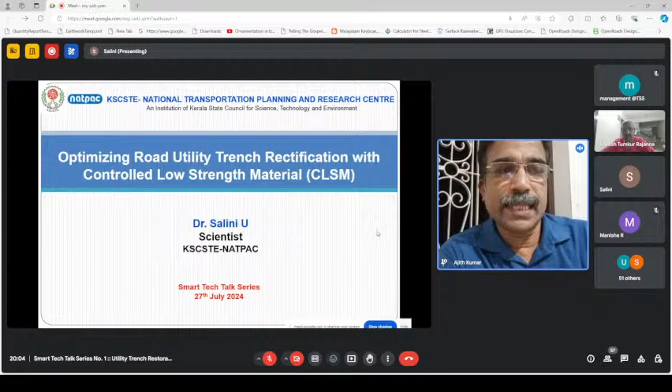As we all know, utility agencies such as water authority, sewage, underground drainage, electricity cables, telecommunication lines, and gas lines have various degrees of authority to install these lines within the right of way of our roads, ensuring they do not create any inconvenience to road users.

They can accommodate the utility in urban areas in either open trench, as shown in the figure, or ducts. For existing roads, if it is beneath them, they can provide a duct, or during new road construction they can provide a duct. So these are the available technologies.

Also in case of heavy traffic, they can push a precast RCC block below the road, within the embankment. So these are some of the solutions and methods by which they utilize the right of way of our road.

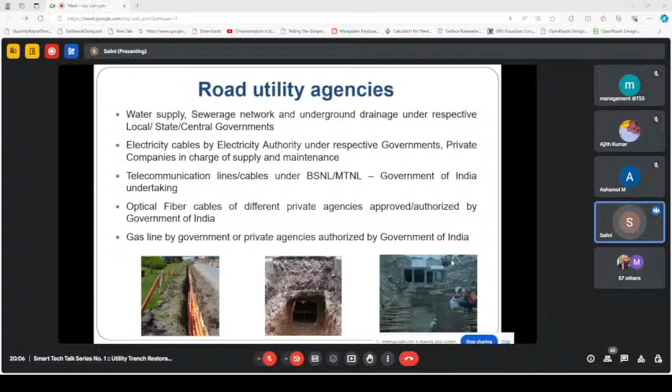IRC guidelines specifically mention how these need to be installed, and what is the location for each agency or each utility, along with the depth of installation specific to different agencies. This is given so that it is secured, and also to safeguard them from any superimposed load.

The depth, as per IRC, is at least 0.6 meter below the bottom of the trench - that is the lowest - and it can exceed 1 meter depending on the type of utility. This table shows that the installation depth for different utilities is different.

This is so that there is no cross connection - like when we have to dig and give a cross connection across the road, these should not be obstructed. That is why different levels of location have been given.

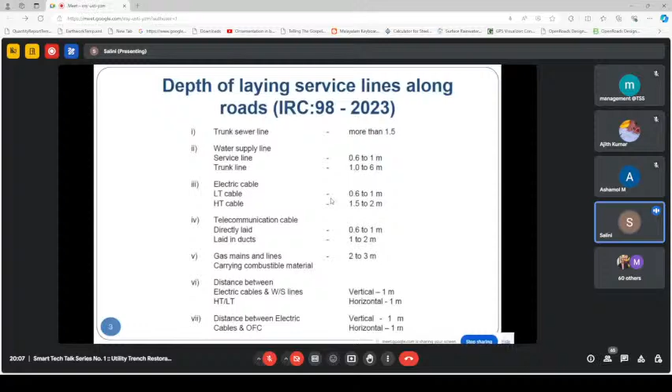Once we dig a trench and the utilities are laid in it, this trench needs to be filled with sand or any granular material. But while filling, we should make sure it is saturated and gets compacted to the modified Proctor density.

Above this granular layer, sand or other granular material filling is usually done till the subgrade level. Above that, whatever the existing road condition and prevalent layers are - base, sub-base, and bituminous layers - those exactly have to be placed so that there is no difference which can occur.

The level of the reinstated trench shall be flush with the adjacent road. If it is not so, it will cause discomfort for riding. Also, any neglect in proper compaction or selection of granular material can lead to many hazards or distresses, and subsidence in that area alone, which again can cause serious issues.

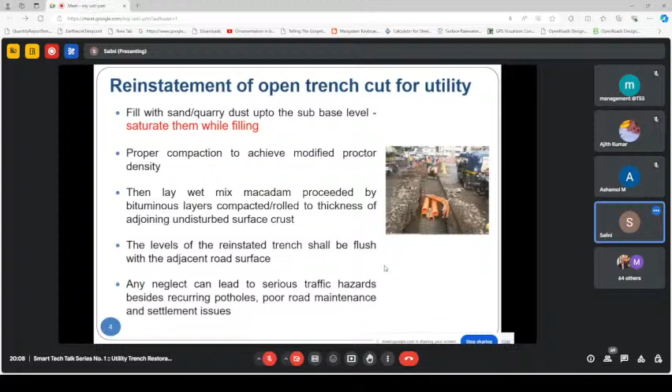The IRC guidelines state that if the depth of fill is greater than 450 mm below the crust, you can fill the entire trench with sand or granular material. Or if the excavated trench material available is of similar quality, you can use that, but make sure it is properly compacted by an ordinary power roller, heavy plate compactor, or a small walk-behind roller.

If the depth is greater, make sure it is mostly granular material which you are filling. Also, depending upon the level and location, each layer should be compacted to the required criteria, similar to embankment and subgrade as given in IRC 36. Deep and narrow trenches are very difficult to compact if the width is not sufficient for an ordinary roller to pass over, so we use small compactors such as plate compactors, frog hammer compactors, or small walk-behind rollers.

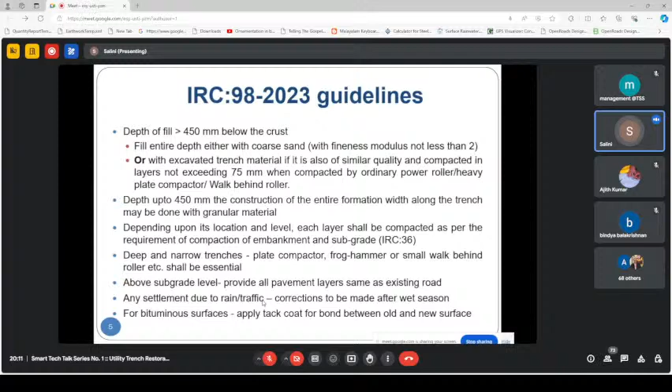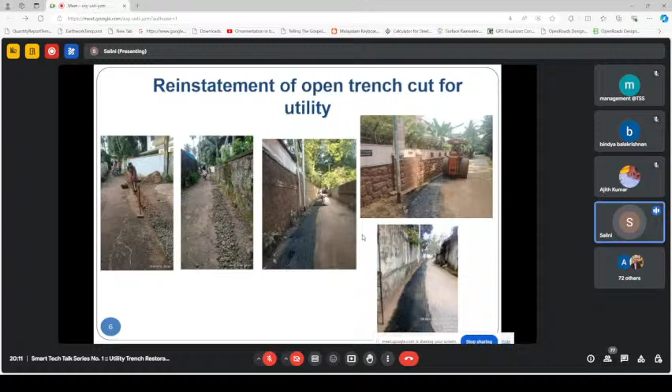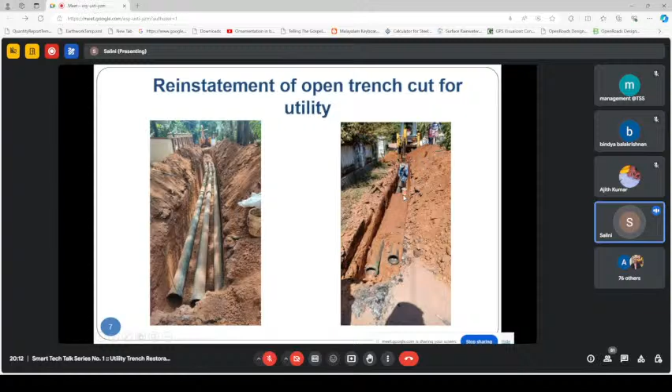This leads to many problems—you can see where the drainage was, there is some kind of subsidence, and if water stagnates over it, it can lead to serious issues like water logging, and in the future some kind of hazards can also happen. These problems mainly occur because some trenches are very deep and narrow and inaccessible for proper compaction. So if we compromise on the compaction or the material, a lot of distress can happen.

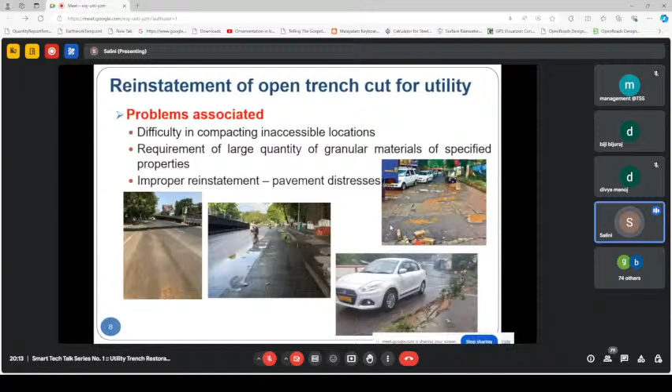So here is another road, in Trivandrum itself. By looking at the picture it may not be that visible, but there is some kind of curved surface occurring just below where the water line was placed, along the entire road stretch. When the vehicle passes, you can feel that vibration, and you can see the vehicle moving in a discomforting manner. Similarly, when the rains started, around some places where the compaction was not proper, potholes were observed.

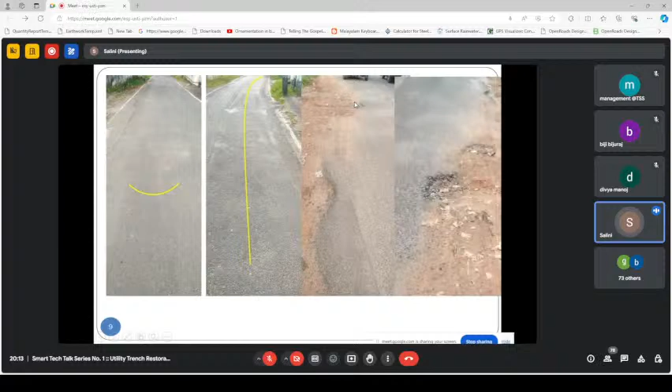So IRC 98/2023 specifies another method also. It suggests an alternate method suitable for places where the trenches or the filling of compact material is not proper, and inaccessible places are also present in these trenches. That alternate method is to use a flowable fill, or controlled low strength self-compacting cementitious material. This does not need any kind of compaction because it is flowable in nature—once you pour it, the hole just gets filled, and its specifications need to be followed. The US Bureau started using it in 1964, and slowly we are picking it up in India also.

So this is another method which most of us are not familiar with, and this is given in the appendix. So this can be an alternative solution. So what is controlled low strength material?

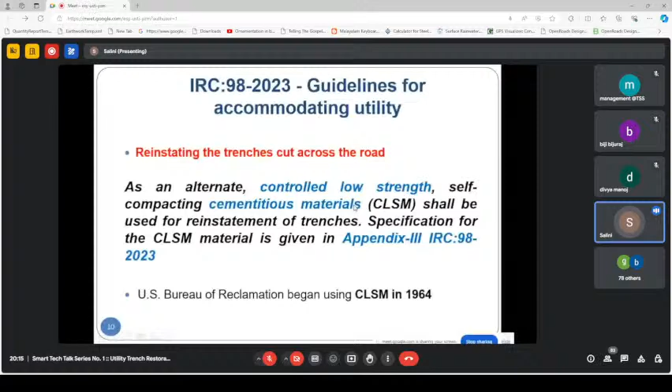Controlled low strength material is a weak, runny concrete mix used for backfills or utility fills. It is mostly suitable when the places are inaccessible and proper compaction by any other method is not possible. So this fill should be in a flowable condition. It should pour like a grout or a lean concrete mix, so it will go and fill all the voids, and then it should set and harden within some specified time, and also have a minimum compressive strength.

In the case of compressive strength, the maximum compressive strength which the code, or as per application, suggests is it should be less than 8.3 MPa. That is for all applications. We say that it need not be very high like our normal concrete, we need only very little strength.

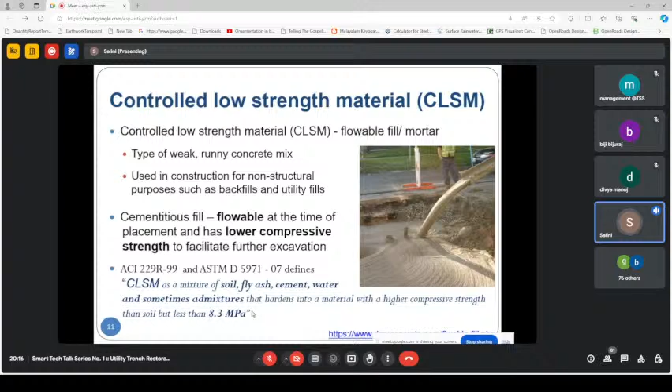So the mix selection depends on two criteria. One is the flowability, that when placing the mix, it should flow and fill the voids, and then the UCS. Most applications require strength between 2.1 MPa to 8.3 MPa.

For excavations, like when we need to access the utility at some later stage, we should make sure that the long-term strength is less than 0.7 MPa if you want to excavate manually. But if you have machineries like a backhoe, you can go up to 2.1 MPa. Beyond that, it is not possible to excavate and it is very difficult, it may even create damage to your utility.

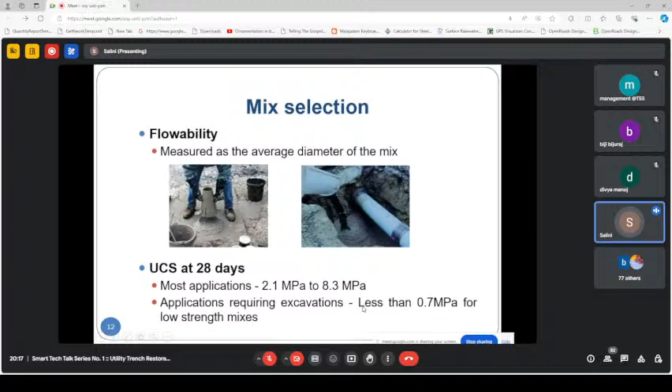So this is how it is done. You pour it and then it goes. Initially your trenches are like this, you need to have a utility here. It may be in such an uneven shape, or because of some adjacent structure, we are unable to compact in the normal manner, so you can keep your setup and fill it by pouring. So there is no problem of compacting this area if any structure is there.

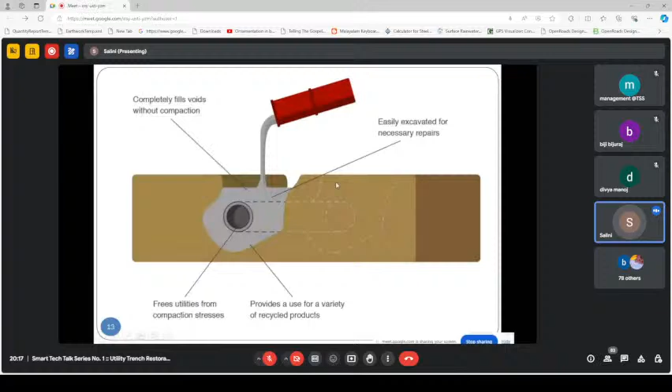So the basic application is for all utility work, and it is actually a replacement to granular fill. Wherever granular fill is not readily available and we need to transport it from other places, which will cause a lot of cost, like transportation charges as well as material charge, in such cases, backfilling pipelines, abutments near retaining walls, near bridge abutments is another area where this is a more suitable method for filling the holes.

Then inaccessible locations, underground storage tanks — these are some of the examples where we can use this.

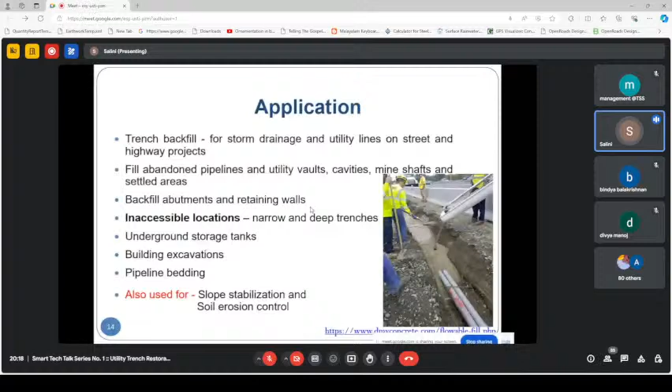So this is how, in granular fill, what the code suggests is we place in different lifts, each around at least 75 mm or some other thickness, and then we compact it. This we pour it, here also you can pour it in stages by giving different lifts. And since it is self-leveling, it does not require any compaction.

The material we typically use is a mixture of water, cement, and fine aggregates such as sand, whatever fine aggregate is available. If sand is not available, you can use quarry dust, quarry waste, or other foundry or recycled materials. Many industrial wastes are being used as fine aggregate for this mix, because if they have some pozzolanic activity, then it is much better, since it will react with cement and water and further hydration will occur, and we get more cementitious material for strength gain.

Mostly we are looking into the strength gain. Also, the strength gain should not be too high so that the material cannot be excavated.

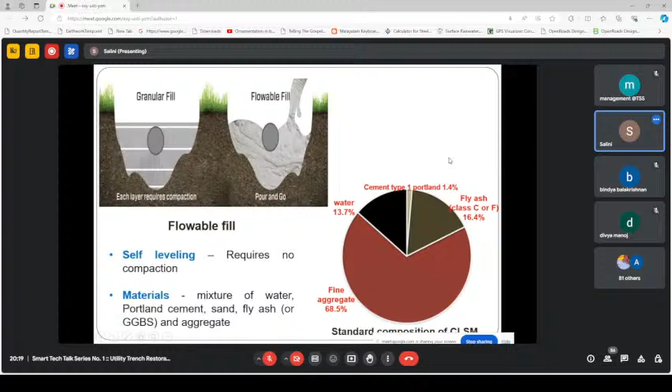So in material selection, what we mostly need to take care of is the cost. Suppose we have earthen material or backfill material readily available, we would not go for CLSM because it will be costlier compared to the locally available solution. Only in cases where it is highly inaccessible can we go for CLSM.

Also, the savings is mostly seen in the labor for placement and compaction, because we don't require any labor for compacting or placing, we just pour it from the plant, the truck, or the ready mix plant. Then, depending on the specific application, the materials should be chosen.

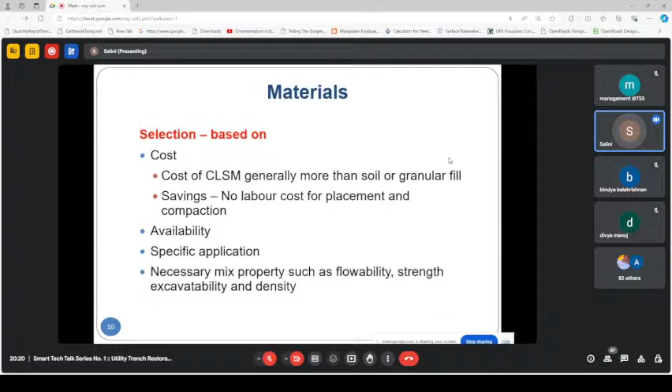The material criteria, mainly the mix criteria, we select based on flowability, strength, excavability, and density. The materials include Portland cement, any cement type mentioned in the codes, any grade—53, 43, 33—whichever satisfies the requirement can be used.

The amount of cement we use is usually 1 to 5%, because we do not need that much high strength. We need only less than 0.7 or maximum 2.1 in case of utilities where we need to excavate at some other point. If we do not need to excavate, we can go further beyond 2.1.

We also check the strength of the soil surrounding that trench, so usually we give the same compressive strength as the subgrade soil. Since we need only 1 to 5% cement, we use around 60 to 90 kg per meter cube.

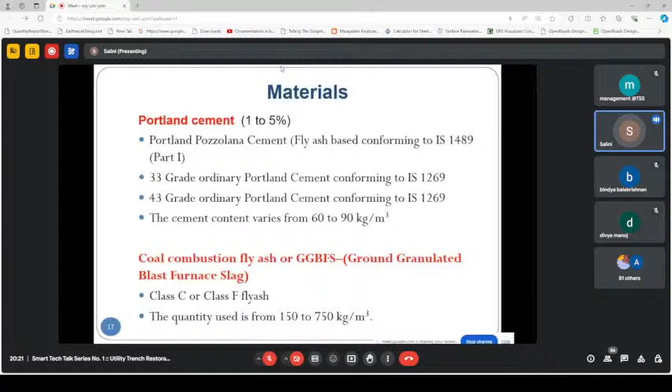Then for other pozzolanic materials like fly ash, GGBS, bottom ash, pond ash, different kinds of ashes can be used. These are suggested because they have pozzolanic activity. It is a fine aggregate as well as an alternate to cement, reacting with water along with the cementitious material such as cement, fly ash, or any other pozzolanic material. They should be sufficiently fine grained so that the material flows.

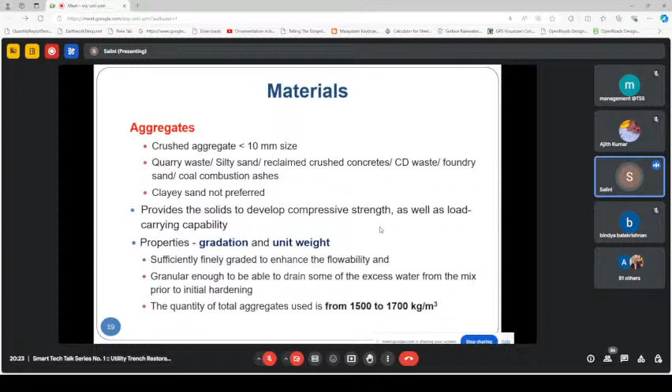Also, the total quantity of aggregates is around 1500 to 1700 kg. Water is another requirement so that we have sufficient flowability. The water-cement ratio should be selected depending on the flowability, strength, and segregation.

Some admixtures are also being used so that there can be improvement in the volume of the CLSM, and to provide improved workability, reduced shrinkage, less bleeding, minimum segregation, and lower unit weight. This also helps in extending the setting times. So extra cement or early-setting admixture may be added if required.

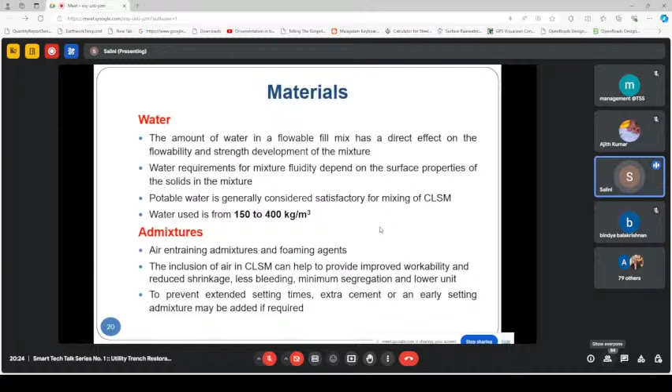Then the properties of the flowable fill basically depend on the mix proportion—the amount of materials from each category, how much we take, and how much flowability it attains. Usually we restrict the flowability to 200 to 300 mm.

Water-cement ratio is another criteria. While placing the CLSM in the field, it should be in a flowable condition—these are called plastic properties, related to transportation and placing in the field. Also, there are in-service properties after it hardens, which we need to ensure so that it can work properly. All of these are affected by the mix proportion.

So the plastic or wet properties, that is during transportation and placing, that we should take care of are flowability, segregation and subsidence, hardening time, and pumpability.

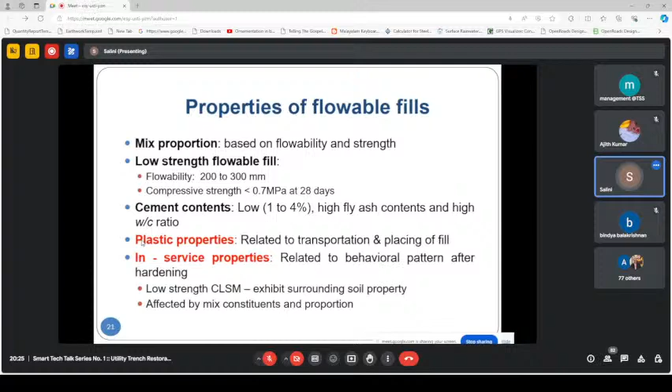Flowability can be measured by slump cone, grout flow, or flow cylinder method. This is how you measure the flowability—in both directions, perpendicular direction, the slump diameter—you just measure and find out. It should not be less than 200 or more than 300.

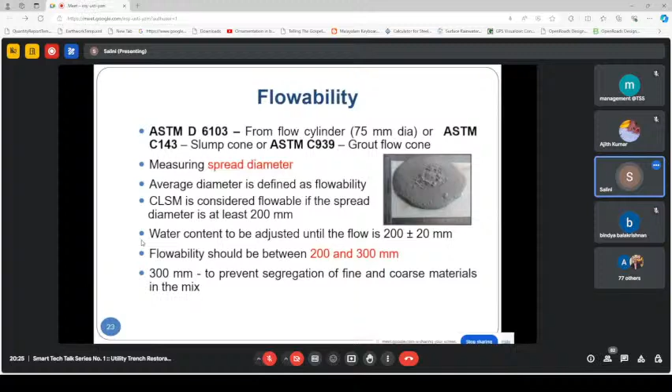If water is higher, then what happens is it comes out as bleed water. This is also not allowed, and the code restricts it to less than 5%.

Along with IRC 98, we have the American code as well—American Concrete Institute 229R—another code which we follow, giving all the standards that need to be followed to check the testing procedures, as well as everything shown here regarding CLSM.

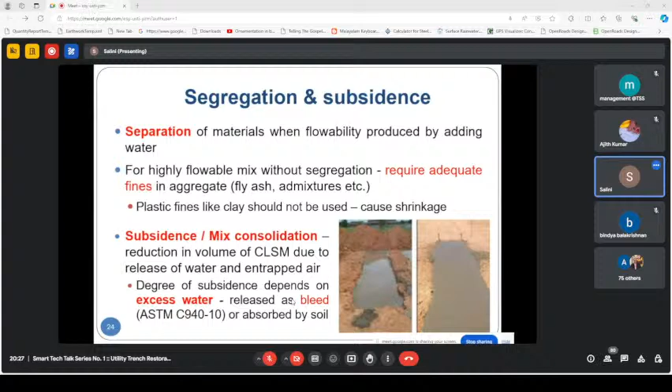Hardening time: you can see these are different trenches they have made to study trial mixes. This is how they have done it in the field to actually study which mix they can use—either laboratory or field trials which we can try out, and then select the suitable fit.

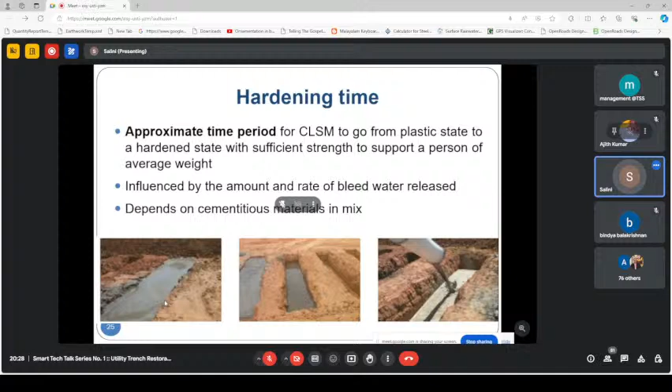Hardening time is the approximate time needed for the mix to set, that is from flow condition to rigid state. It depends on the rate of bleeding as well as the cementitious material in the mix. Hardening is usually measured similar to concrete, with the penetration test or the Kelly ball apparatus, and it generally takes about 3 to 5 hours.

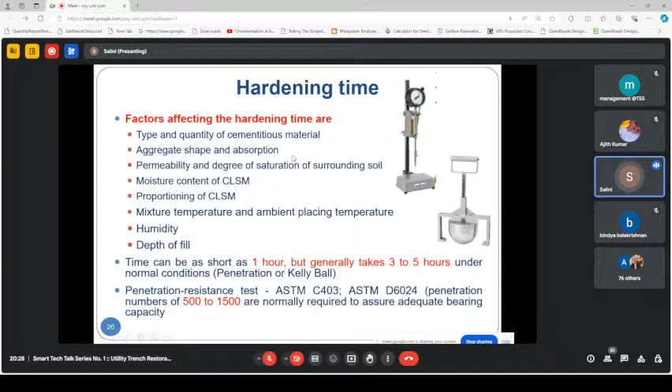Sometimes it can even happen within 1 hour. These are the factors which affect the hardening: the aggregate size and shape, quantity of cementitious material, the proportioning is very important, and the water in the CLSM, temperature, environmental condition, etc.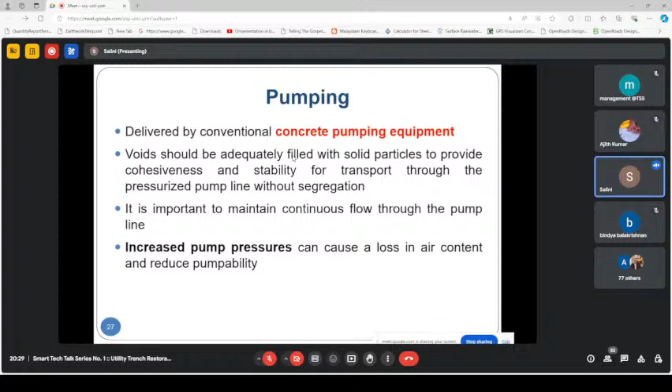So till now we have discussed the placement properties, that is while transporting and placing. Now these are the in-service properties, the properties of the mix during its service period, that is after it gets hardened. They are compressive strength, density, hydraulic conductivity, compressibility, settlement, excavatability, and shrinkage.

Excavatability depends on the compressive strength, which should be less than 0.7 MPa at 28 days or long-term strength, so that the mix can be excavated using pickaxe or light equipment. And if it is less than 2.1 MPa, we can use some JCB or backhoe to excavate the CLSM mix. But also the hydraulic conductivity, as per code, should be between 10 raised to minus 4 to 10 raised to minus 5 centimeter per second, similar to our compacted granular material.

This actually acts as a granular fill. Even though we see it as a concrete mix, it functions as a granular mix. So whatever properties which the granular fills should attain, all those properties this flowable fill also should attain during its service life. It acts as a soil only.

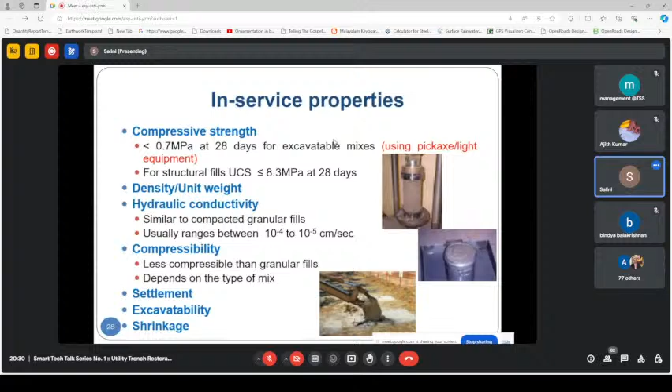So for density, while placing, because of the presence of aggregate and fine aggregate, the usual range of density in this mix is 1840 to 2300 kg per meter cube. But if we are not adding fine aggregates, it is just like a mortar - we add only fly ash, cement, and water, then it comes around 1440 to 1600 kg per meter cube. So this depends on the proportion of the materials in the mix.

Also, density can be maintained by taking care of the lightweight aggregates. For easy workability and pumpability, these values are put. We need to make sure that it is workable, and pumping is also possible. If it is highly dense, then it may not be that workable, or pumping also we can have some issues. So in order to maintain this density, we use lightweight aggregate. That is why in most cases fly ash or any other kind of recycled materials is preferred.

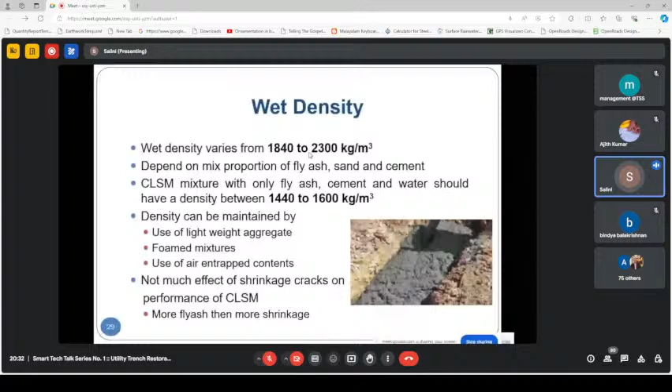And even if some amount of shrinkage cracks are seen, it will not affect the performance of the CLSM, unlike in case of concrete, where if some shrinkage cracks or tension cracks are seen, it can affect the performance of the pavement. But this just fills the void, and it acts as a support. So usually some amount of shrinkage cracks will not affect its performance much.

Then excavatability, as I said, is very important. Sometimes what will happen is we add more cement, we add more fine aggregates, and the compressive strength becomes more than what is required. In such cases, it becomes very difficult to excavate. And then if there is some leakage, or if there is some kind of widening happening and we need to relocate the utility, it becomes very difficult. So make sure that strength does not go beyond what is required.

In order to show that we have done it properly, we may increase the strength, but that also will lead to harm. So the strength should be maintained. And there is another criteria, that is removability modulus, which depends on the dry density and the 28-day compressive strength. It should be less than 1. This relation is given in ACI 229R. If this is maintained, then we can see that there are chances of excavating the material. Then the cement and class of fly ash.

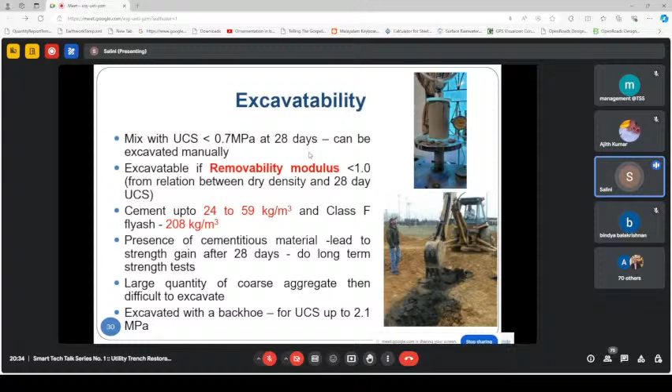മിക്സ് പ്രൊപ്പോർഷൻ ഞാൻ പറഞ്ഞ പോലെ, ഓരോ ഐറ്റം എത്ര പെർസെന്റേജ് ആഡ് ചെയ്യണം, എങ്ങനെ ആഡ് ചെയ്യണം എന്നെല്ലാം IRC 98 ൽ കൊടുത്തിട്ടുണ്ട്. ആദ്യം വെള്ളം ആഡ് ചെയ്യണം, പിന്നെ അഗ്രിഗേറ്റ്. മിക്സ് ചെയ്യുമ്പോൾ ഇവ രണ്ടും ചെറുതായി മിക്സ് ചെയ്ത ശേഷം സിമെന്റ്, ബാലൻസ് അഗ്രിഗേറ്റ്, ബാലൻസ് വാട്ടർ എന്നിവ ആഡ് ചെയ്യണം.

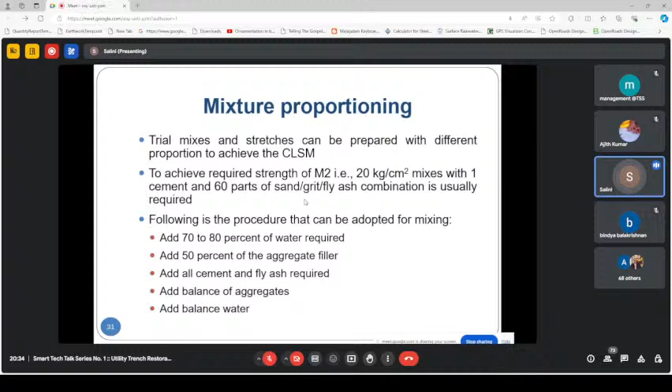കാരണം നമ്മുടെ CLSM M2 to M8, within this range only it will be there. So this is another calculation, shown by ACI 229R. Each weight taken, this is the range for it. Normally for our mix this is the required range. If it's more, the CLSM mix becomes difficult to work with. That is why this range is kept.

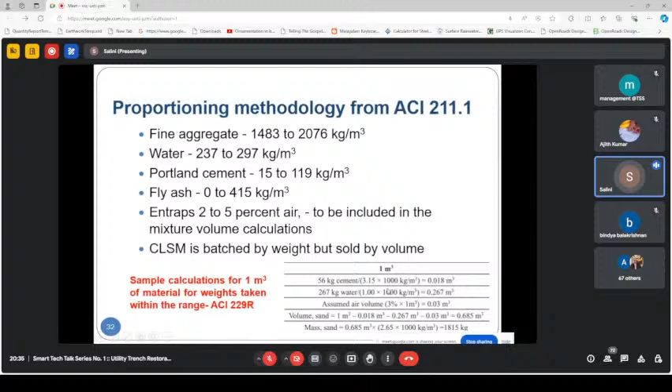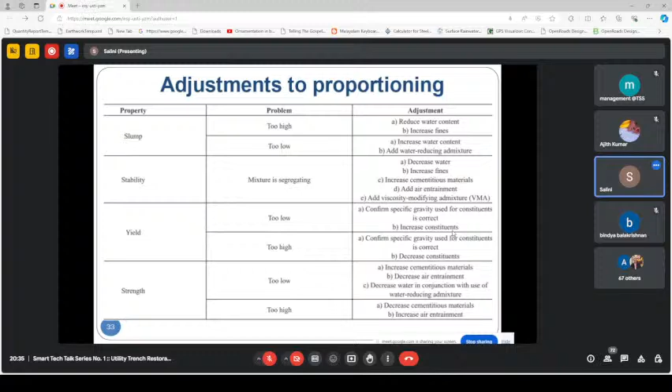That proportioning, how do you find out? Based on these properties - if it is too low, the rectification is also given. What all rectification methods we have to adopt if our strength is too high or too low, stability and slump - that is flowability - in both cases, how we can rectify the mix.

That is also given. Now placing - we can see that it can be placed using chutes. Then transportation from the plants, we can load it to the ready mix concrete drums, and through trucks we can transfer it to the site using the chutes. So ready mix concrete trucks, batching plants, concrete mixers, pug mills - all these we can use.

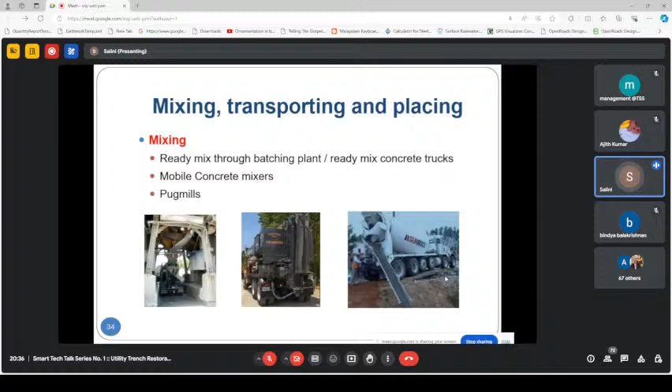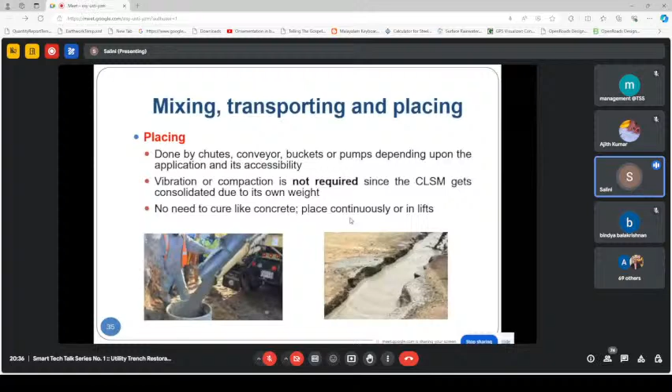All these are available here. Using chutes or conveyor belts, buckets, we pour it in. And since there is no vibration and compaction applied to it, it becomes a self-leveling, self-compacting material. Also curing the concrete is not needed much, then it sets. We can place it continuously or in lifts, either in different layers or continuous.

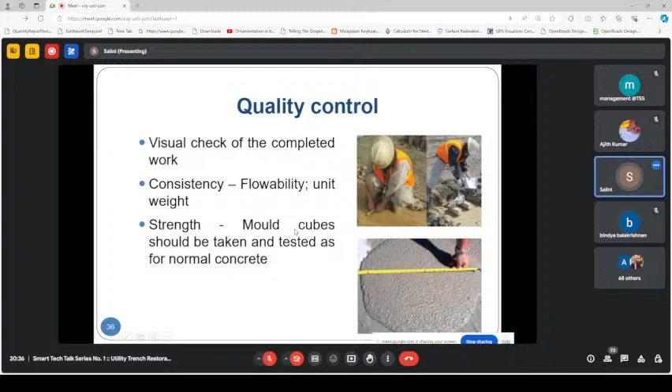So how do you do quality control? We need to check its flowability, whether it is flowable, then check the unit weight, and take mould cubes to find the strength also. These three things we can check in the field for the CLSM mix.

Also, if suppose you don't have the sufficient quantity, but you need to fill the bottom of a trench and fill the voids below the trench, you can even do this kind of calculation for different depths - full depth or partial, or just below the pipe - so that for the rest, if you have granular material available, you can use that. So these kind of calculations also can be done.

And then these are some of the field tests, and this is an example of providing CLSM at IIT Madras.

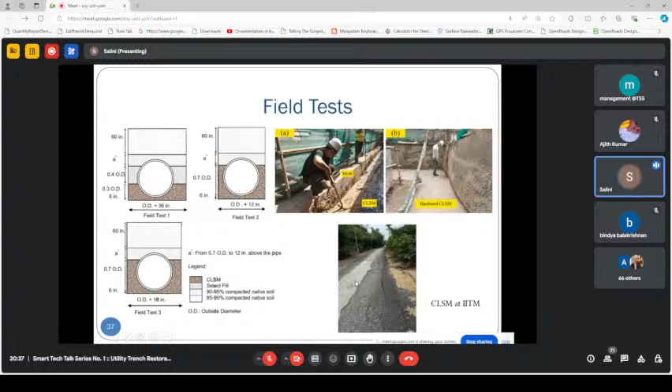What are the advantages? We are getting this technology already in IRC 98, 2023 and 2011, Appendix 3. This method is suggested where there is scarcity of compacted granular materials for compaction, or there is inaccessibility to the trench. And other guidelines - American standards are there, because they have been using it continuously for the past 50 years. We can use that.

And I would like to acknowledge Professor Veeraraghavan, Assistant Professor Dr. Lini Dev, then Engineer Lokesh, Executive Director Infra Support, and my office, KSCSTE NATPAC, which allowed us to conduct research in CLSM. So, thank you all.